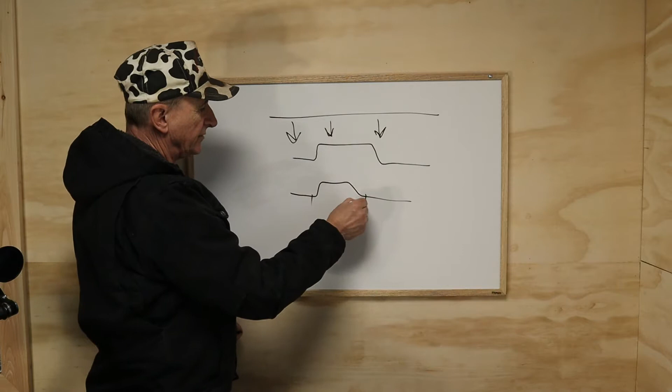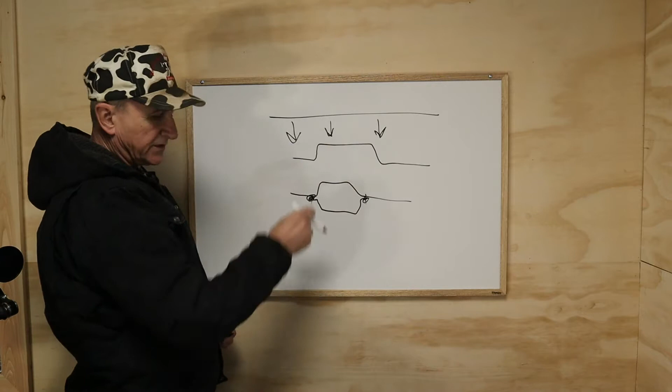like that. They pressed the steel onto the form block, and the finished piece of steel looks like that. And they trim it off here, make two of them, flip them over so they look like this. And then they weld it here and they weld it here. Stand it on edge the way the tube is. Little seam at the top, comes down, rolls out in and down on both sides, making a square tube with a bead here and here. And I'm going to try to recreate the same thing.

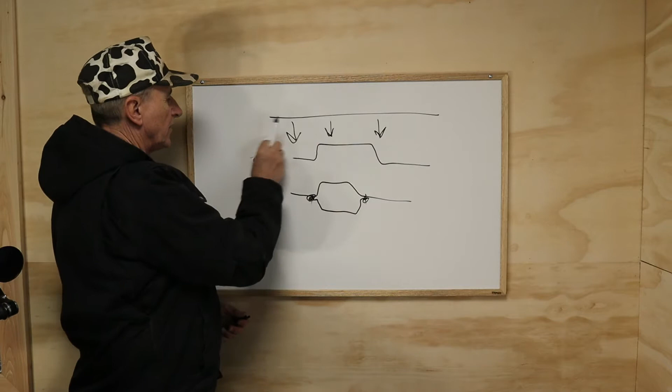What we're going to try to do is form a piece that's not only flat, it's compound. It goes around the back to make the hoop, the rear hoop. If we look at it straight down from the top of the bike, we've got one coming out each side like this. Shocks mount on here, shock mounts on here. Right now these go out here and they end. I'm going to cut them off in here, cut them off in here.

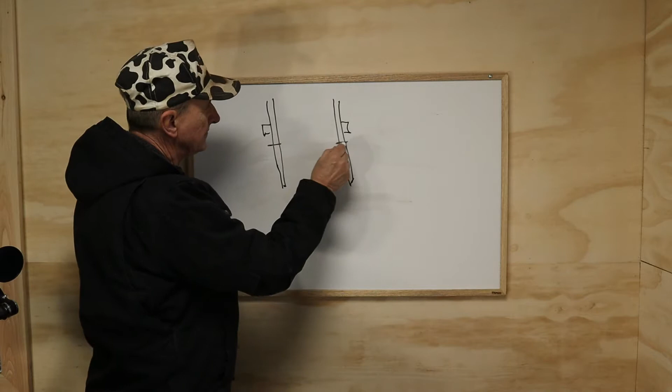I'm going to make form blocks to make a piece that does this. That looks like it came from the factory. That's what we're going to attempt to do. It's a lot of forming, a lot of bashing on metal to get it to work out. But let's try it out. Let's see if we can do something a little different than just a bent piece of tube. Bent piece of tube looks great. Nothing wrong with it. I just want to try this, something different. Let's get on with it.

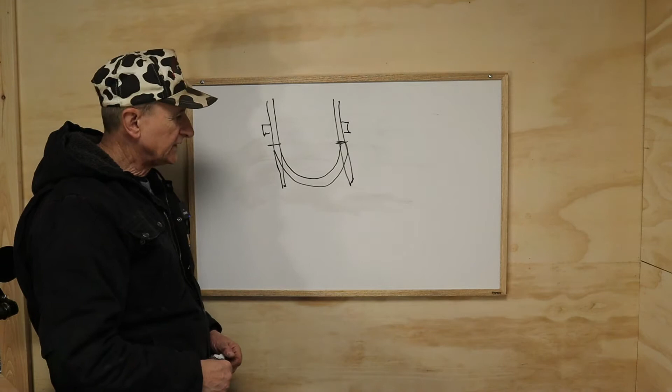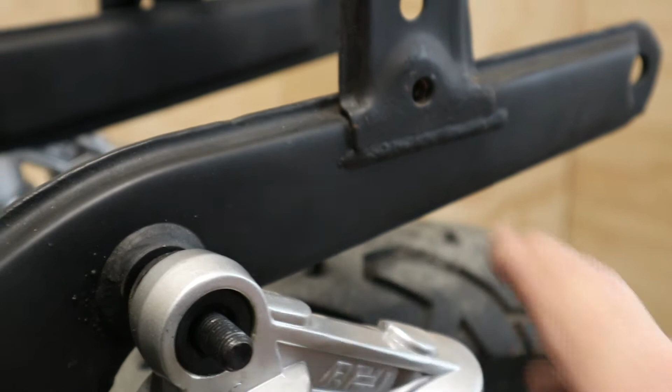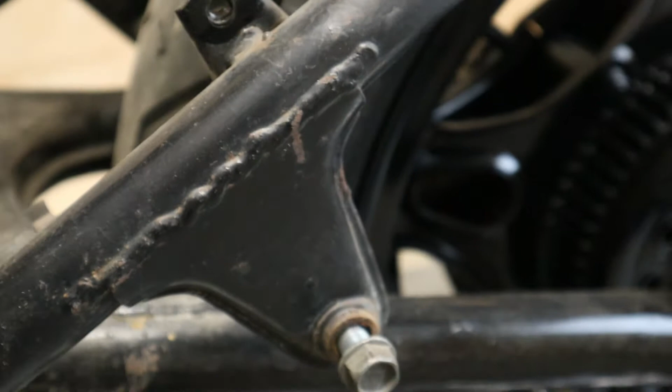So this is the bracketry I'm talking about here. We're going to take this weld off of here, nice and neat, get it down to this tube as best we can without cutting it up too bad. Then we're going to take off this rear foot peg mount, get rid of that, both sides. Clean up these little brackets in here, this little bracket in here. Hang on, get on the picture.

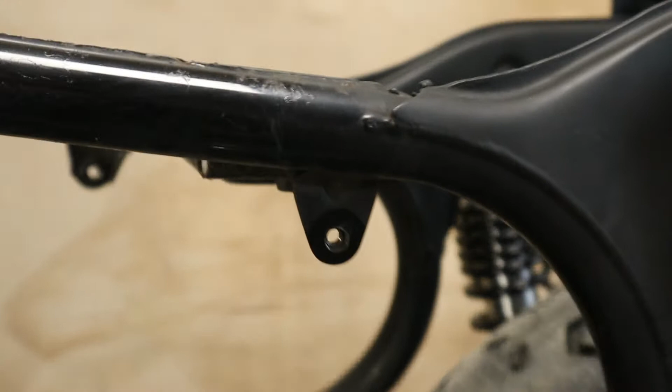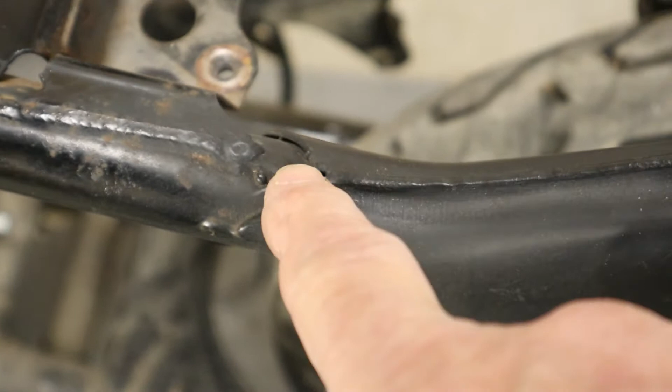A little bracket in here, and the one on the other side. So what I'm going to do here, as you can see, this bracketry is two pieces of mild steel, flat, that are pressed into the shape and then welded along this seam ridge here. Gives you that little raised ridge, which isn't overly pretty, but it's part of the way they did the

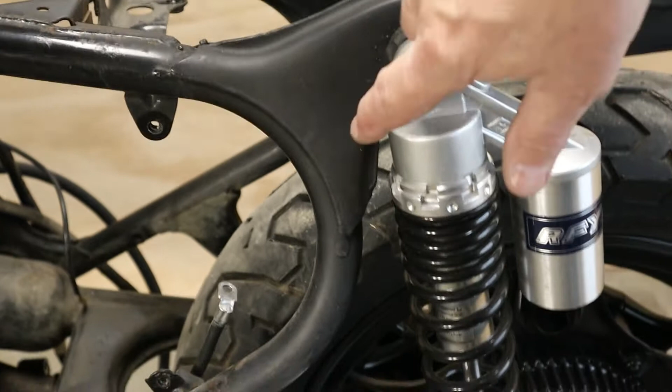original bike. And if I want to completely redo it, then I'm going to take off all of this and put a tube from here straight here, pick up this shock mount and around the end. But I want to try to make this look like it kind of came out of the factory, and I'm going to recreate this shape of tube, and I'm going to recreate it so that it goes from this side,

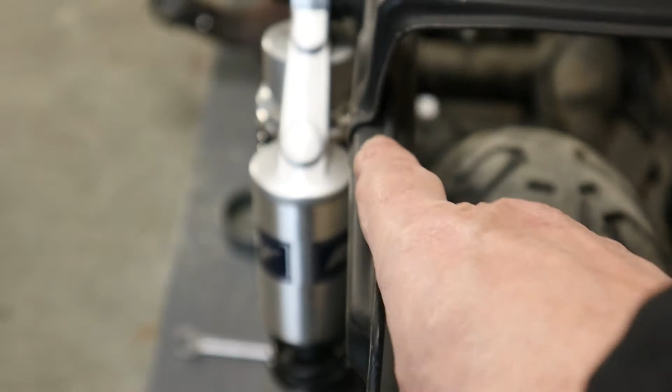nice hoop around here, to this side, right in here. It'll look just factory once I grind it and feather it in. So that's kind of the plan.

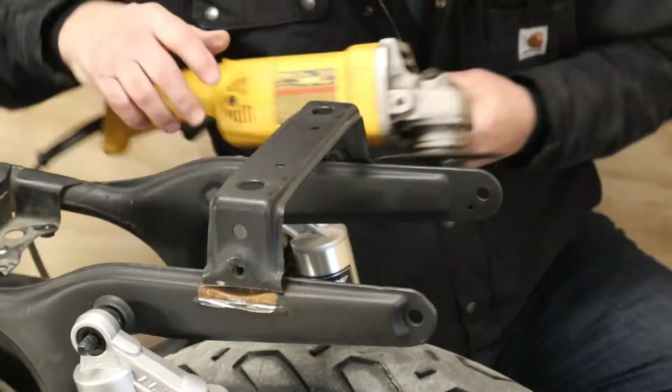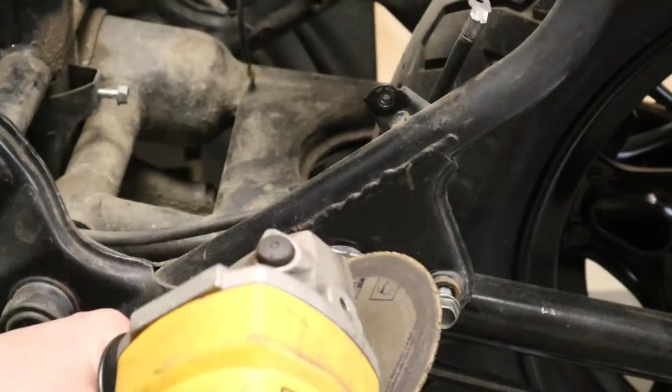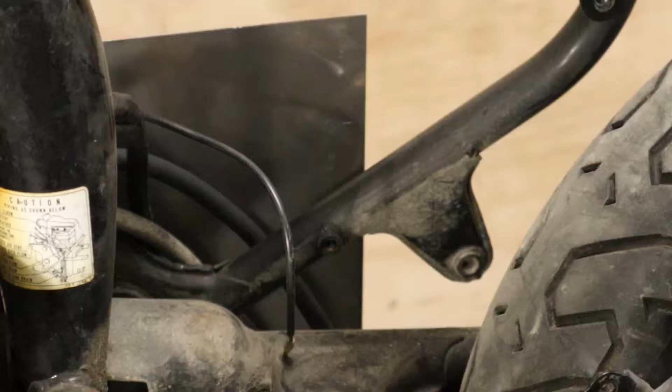You want to be careful here and not cut into your main tube. We can grind the weld off fine, but we don't want to cut into the tube at all. Yeah, looks pretty good. I'll reach through and get the other inside from this side and then switch sides and do it the other way.

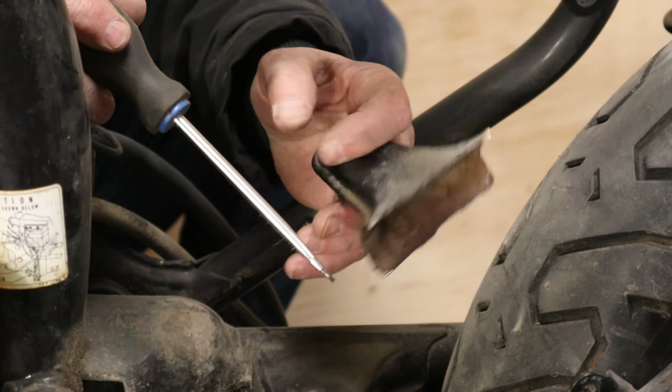See, that's what I'm talking about. It's two formed pieces of metal welded together with a bead on the edge. Does it look real pretty? Nope. Tubes look prettier all the time. But let's just try to make it similar and look like it was just supposed to be there.

It'd be a lot easier without the back wheel on, of course. But then that wouldn't be a challenge, would it?

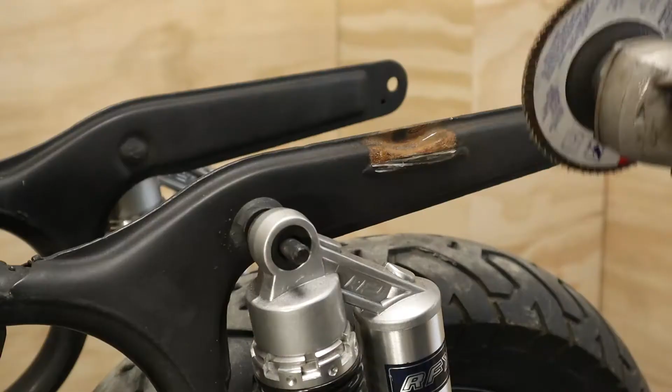Of course, do the same on both sides, inside, outside. I'll get all that done. Now I just have to decide where along here I'm going to cut this off. I want to bring the back of our hoop around just past the back of the axle in this area for the back. So I've got to cut it off in here somewhere.

So I need to get this diameter or distance across here figured so I can start to make my form blocks so that this comes out proper. So when I mate the two up, I can weld it here, blend it, and then you won't see it, and then it should just carry on like this around here. That's the plan. I don't know. Let's see if we can do it.

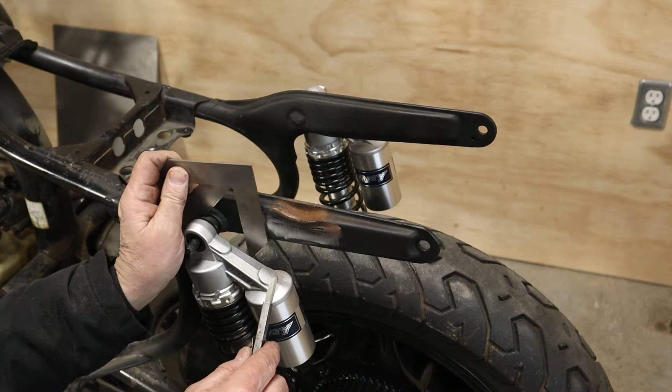So I've decided that I want to cut it off right about the edge of where we ground off this area here. Actually, you know what? Let's just go a little long to start with, and then we can cut off more or less as required. There we go. So just past this knockout for the bolt that was here. Take a quick little measurement on that.

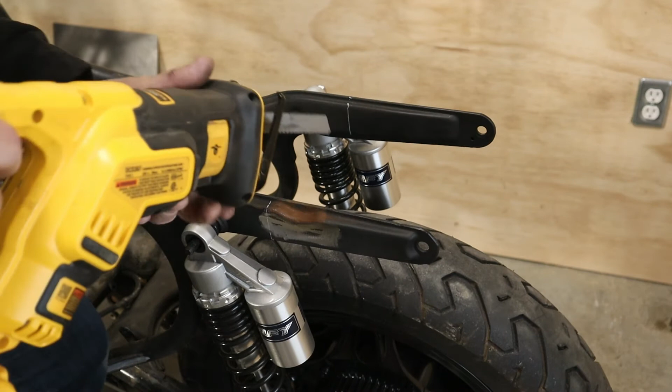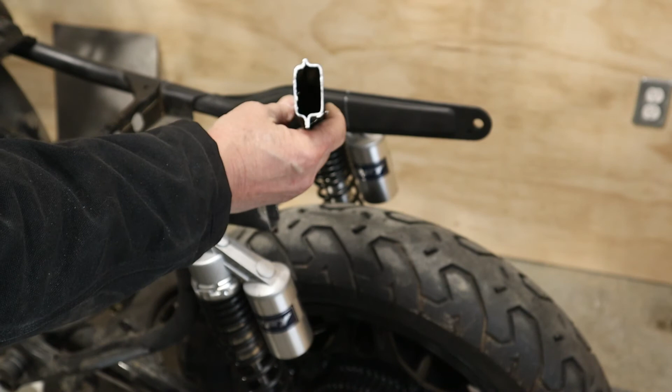There we go. We'll cut those both off there for now. I think they might be a little bit too long, but that's fine. We'll deal with that. It's easier to cut off than add on. Okay, let's give this a shot. So that's the shape we're going to have to try to recreate. This looks like fun.

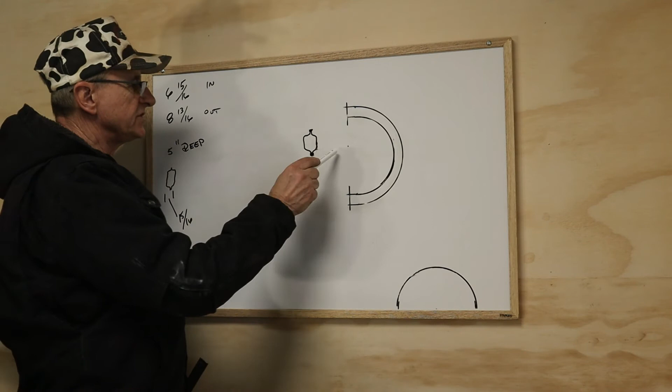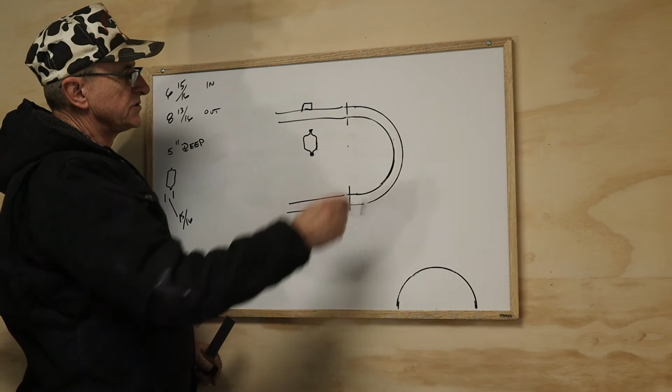Okay, with our measurements that we took for the inside diameter and the outside diameter of our hoop that we're going to put on the back, we wanted about 5 inches deep, I figured, from the back to where it's going to weld on to the stock part of the frame. It's going to weld on here, shocks sit in here, like that. So this part we need to form out of our sheet metal, which is going to be in

this shape, 2 halves. The seam will go around the top of here, the same as the seam that already exists on here, and see if we can make it match up and look the same. It's a lot of work, a lot of fooling around, but we'll take a couple of days and see what we can do. Never say never until it doesn't ever work.

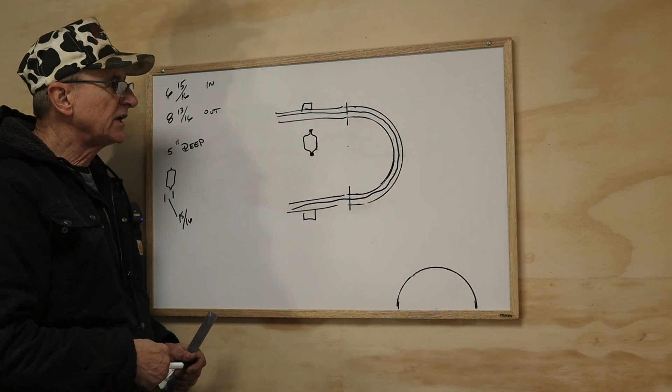But rule of 3 always plays on these kind of things. Make 1, doesn't work, but you just learned something. Make 2, doesn't work, but you develop some skills and you learn more. Make 3, develop more skills, and it usually works. So these could take a few builds to get them just right, but let's play with it and see what we get.